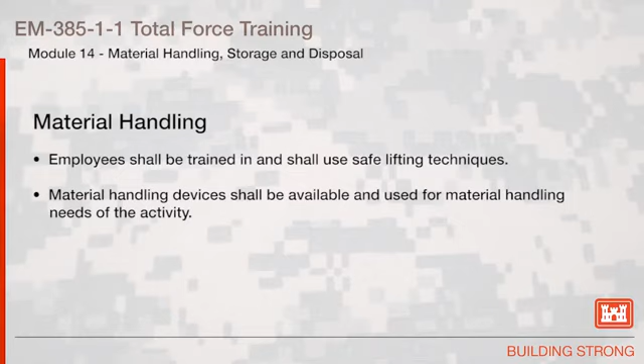Employees shall be trained in and shall use safe lifting techniques. Material handling devices shall be available and used for material handling needs of the activity.

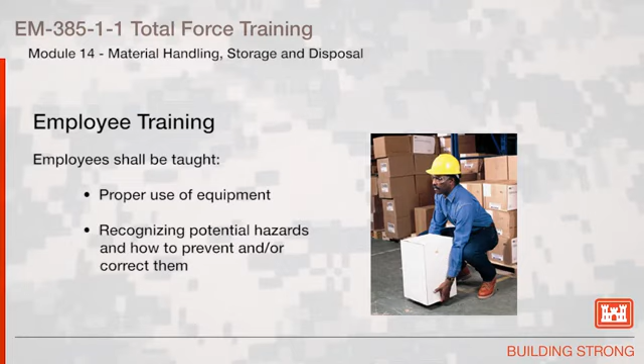Employees shall be taught how to lift safely, how to avoid unnecessary physical stress and strain, what they can comfortably handle without undue strain, proper use of equipment, and recognizing potential hazards and how to prevent or correct them.

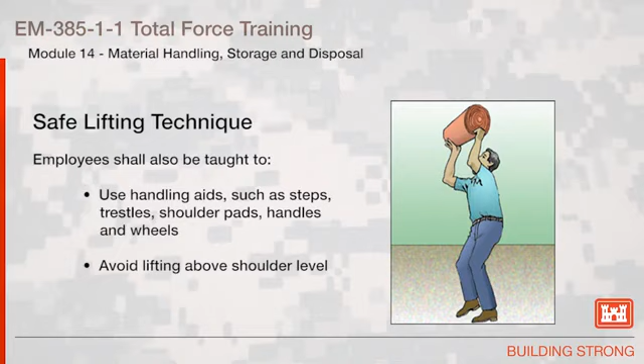Employees shall also be taught to break the load into parts, get help with heavy or bulky items, lift with the legs, keep the back straight, do not twist, and use handling aids such as steps, trestles, shoulder pads, handles, and wheels. Avoid lifting above shoulder level.

The following steps are recommended as a proper lifting technique: stand close with a shoulder width stance, squat by bending your knees and hips, put the load close and grip it, tighten your stomach, lift your head, and raise up using your legs.

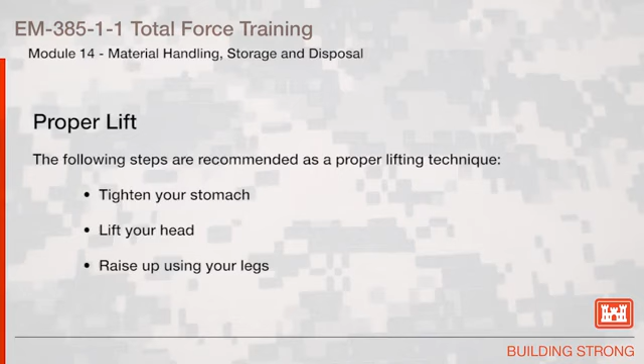Whenever heavy or bulky material is to be moved, the material handling needs shall be evaluated in terms of weight, size, distance, and path of movement.

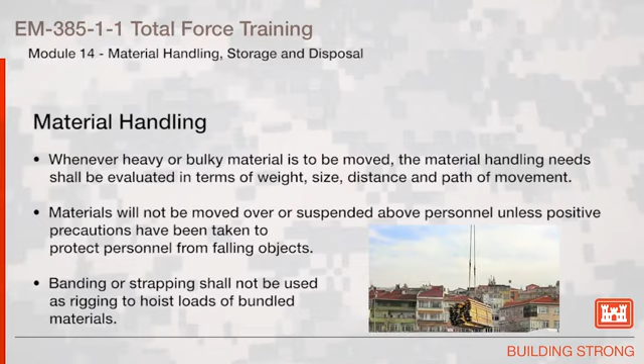Materials will not be moved over or suspended above personnel unless positive precautions have been taken to protect personnel from falling objects. Banding or strapping shall not be used as rigging to hoist loads of bundled materials.

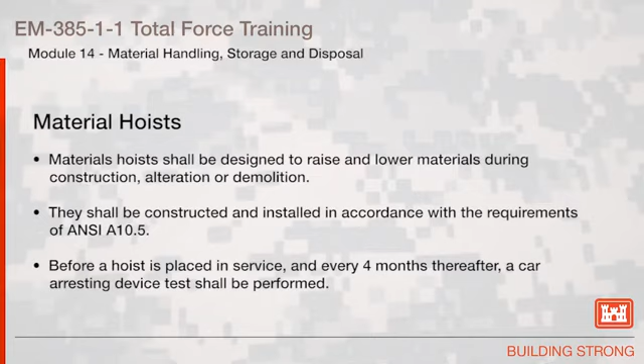Material hoists shall be designed to raise and lower materials during construction, alteration, or demolition. They shall be constructed and installed in accordance with the requirements of ANSI A10.5. Before a hoist is placed in service, and every 4 months thereafter, a car arresting device test shall be performed.

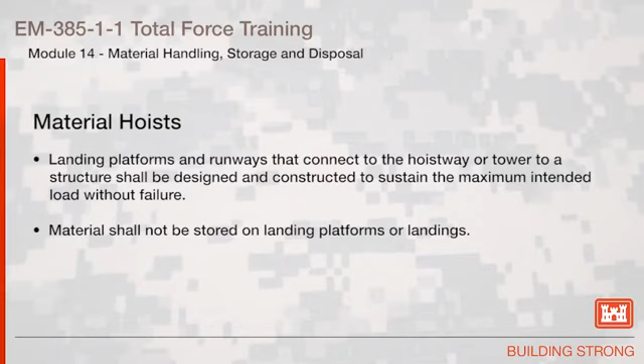Landing platforms and runways that connect the hoistway or tower to a structure shall be designed and constructed to sustain the maximum intended load without failure. Material shall not be stored on landing platforms or landings.

All material in bags, containers, bundles, or stored in tiers shall be stacked, blocked, interlocked, and limited in height for stability and security against sliding or collapse.

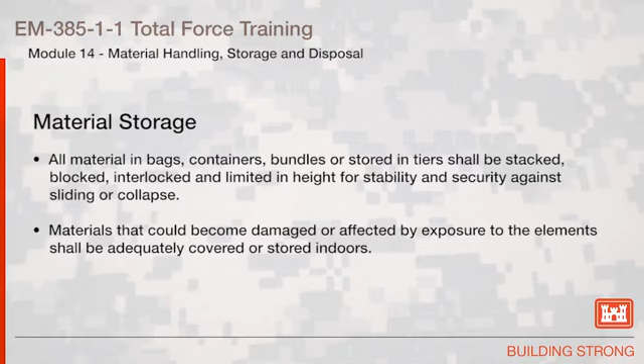Materials that could become damaged or affected by exposure to the elements shall be adequately covered or stored indoors. Materials shall not be stored in areas that would interfere with other normal operations, nor stored directly under power lines. Material storage shall be in compliance with the manufacturer's recommendations.

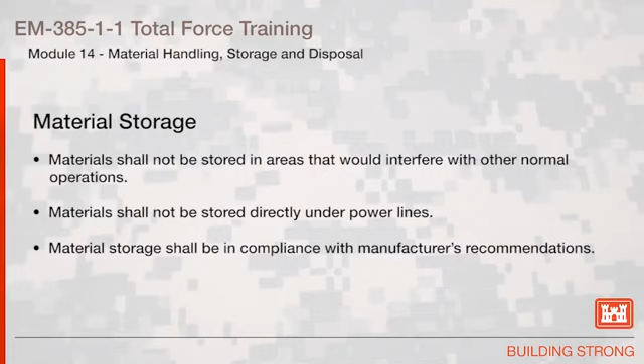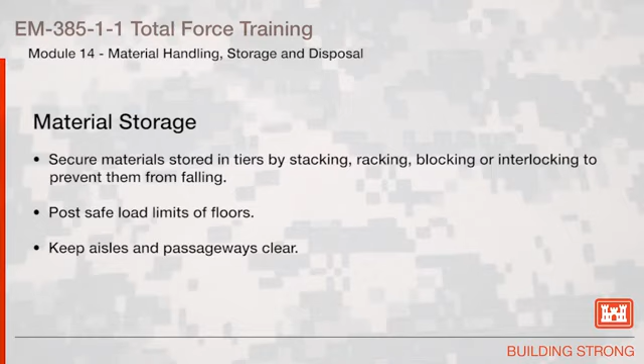Secure material stored in tiers by stacking, racking, blocking, or interlocking to prevent them from falling. Post safe load limits on floors. Keep aisles and passageways clear.

Material should not be stored on scaffolds, work platforms, or runways in excess of the standards in Section 22. Materials stored in bins or hoppers that could create an engulfment hazard shall be evaluated and comply with the confined space requirements in Section 33.

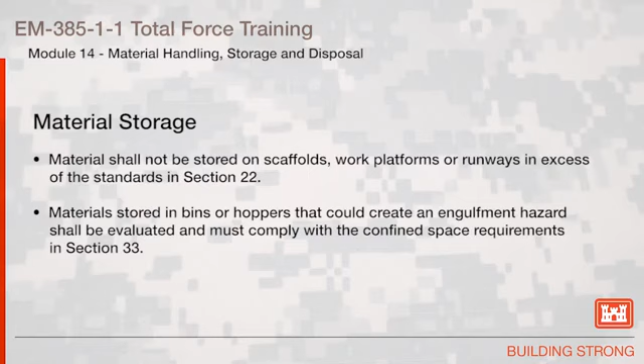Do not store non-compatible materials together. In buildings under construction, don't place stored materials within 6 feet of a hoistway or floor opening, nor within 10 feet of an exterior wall that does not extend above the material stored.

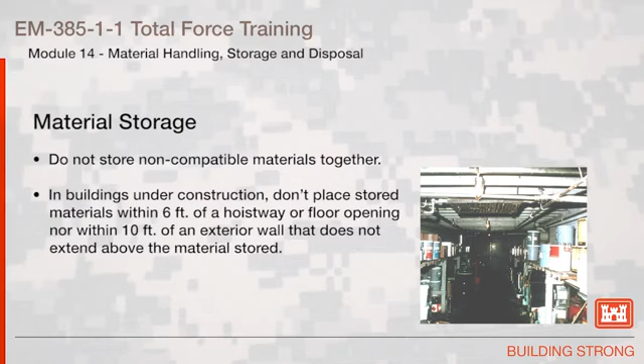When working with scaffolding, avoid potential of overloading. Placing masonry products on a scaffold could overload the deck.

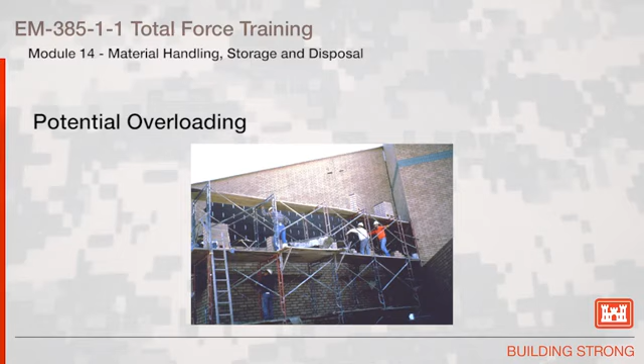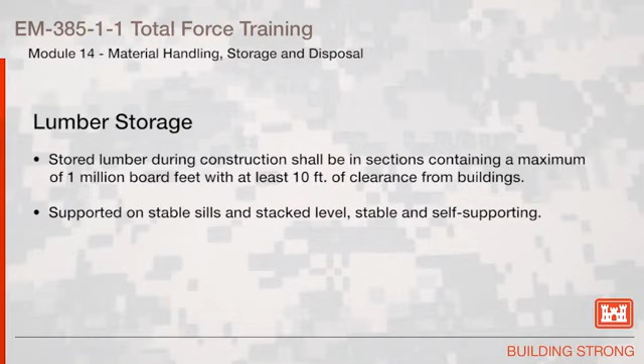Stored lumber during construction shall be in sections containing a maximum of 1 million board feet with at least 10 feet clearance from buildings. Supported on stable sills and stacked level, stable, and self-supporting.

Lumber piles shall not exceed 20 feet in height. Manually handled piles shall not be stacked more than 16 feet in height. Reusable lumber shall have all nails withdrawn before it is stacked for storage.

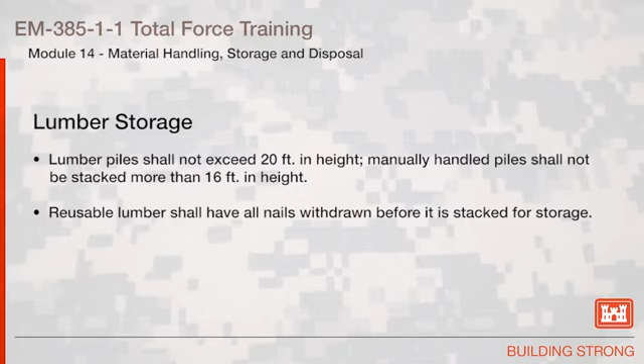Bags of cement and lime shall not be stacked more than 10 high without setback, except when retained by walls of appropriate strength. Bricks shall be stacked on an even, solid surface.

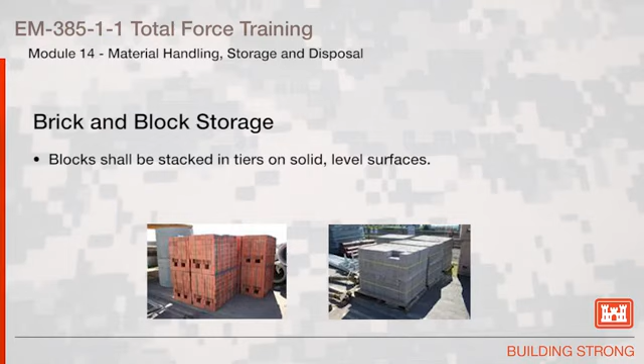Bricks shall not be stacked more than 7 feet high. Blocks shall be stacked in tiers on solid, level surfaces. Reinforcing steel shall be stored in orderly piles away from walkways and roadways.

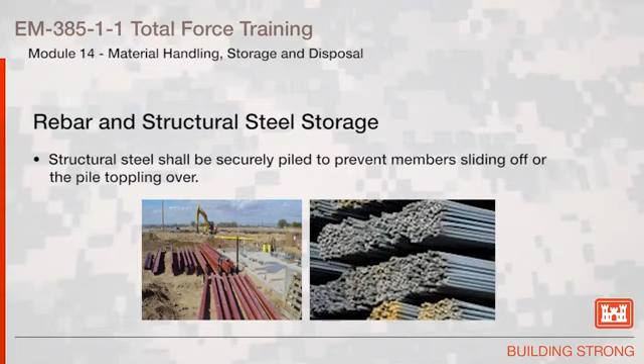Structural steel shall be securely piled to prevent members sliding off or the pile toppling over. Pipes, unless racked, shall not be stacked higher than 5 feet.

Work areas and means of access shall be maintained safe and orderly. Sufficient personnel and equipment shall be provided to ensure compliance with all housekeeping requirements.

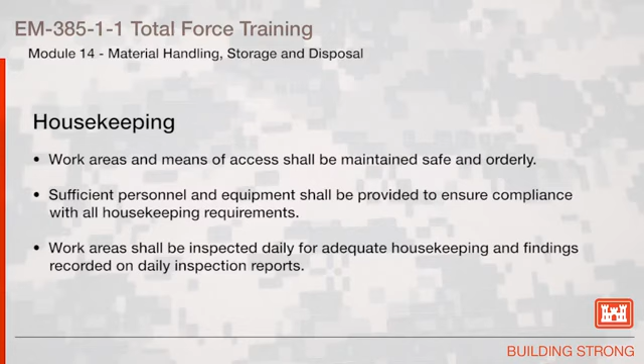Work areas shall be inspected daily for adequate housekeeping and findings recorded on daily inspection reports. Work will not be allowed in those areas that do not comply with the requirements of this section.

All stairways, passageways, gangways, and accessways shall be kept free of materials, supplies, and obstructions at all times. Protruding nails in scrap boards, planks, and timbers shall be removed, hammered in, or bent over flush with the wood at the time it is disassembled.

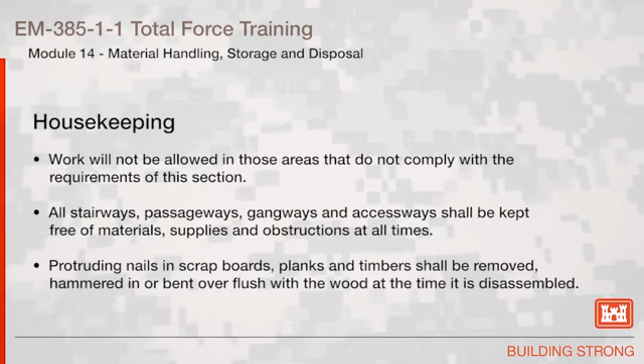A competent person shall determine and document the size, weight, and height of fall of potential falling debris. Materials, scraps, equipment, tools, and debris that have fallen into the net shall be removed as soon as possible from the net and at least before the next work shift.

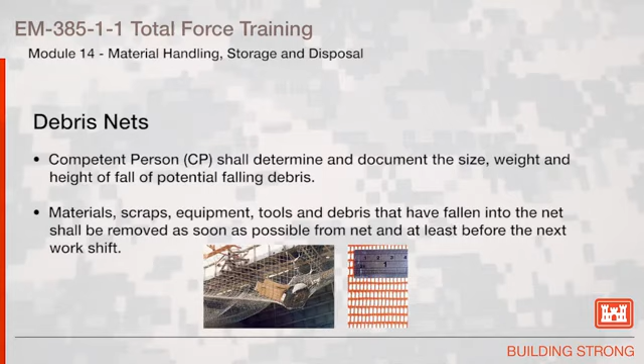Use an enclosed chute when you drop material more than 6 feet. If you drop debris through holes in the floor without chutes, enclose the drop area with barricades.

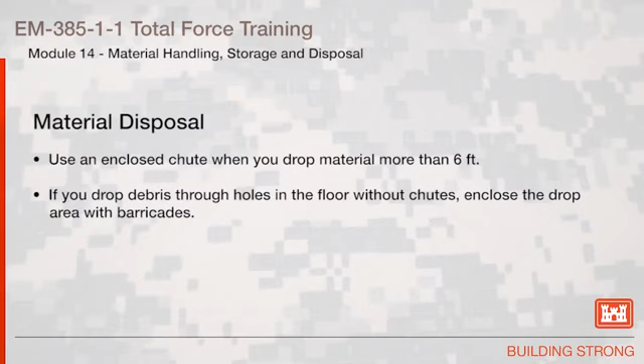Waste material and rubbish shall not be thrown down from a height of more than 6 feet unless the following are complied with: enclosed chutes. Without chutes, you're required to have barricades and signs.

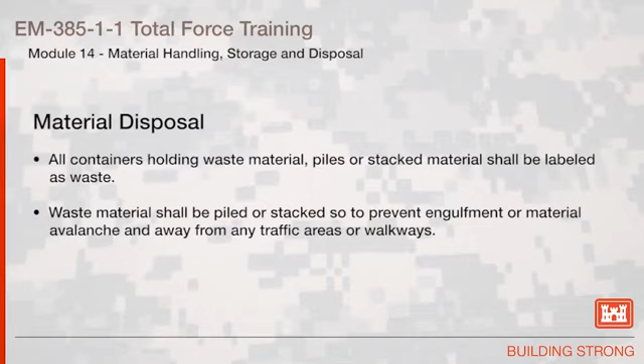All containers holding waste material, piles, or stacked material shall be labeled as waste. Waste material shall be piled or stacked so as to prevent engulfment or material avalanche and away from any traffic areas or walkways.

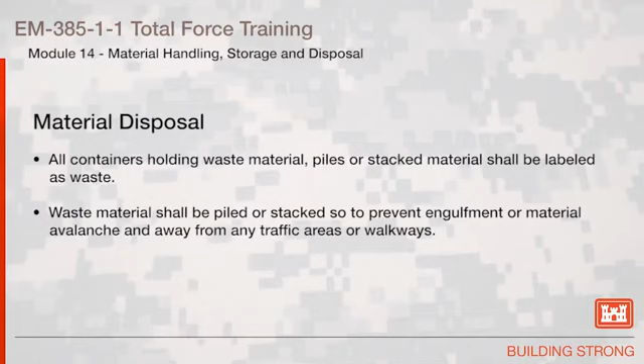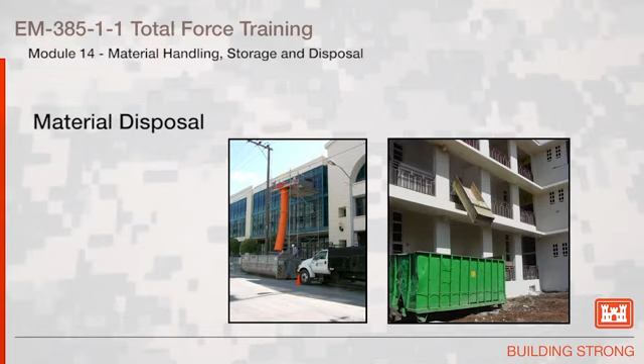The picture on the left illustrates a proper enclosed chute. The picture on the right indicates a site-made chute that does not meet the requirements.

For the proper handling of materials, use proper lifting techniques. If the object is too heavy, use proper lifting equipment. When using forklifts to move materials, watch for potential struck-by and crushed-by dangers.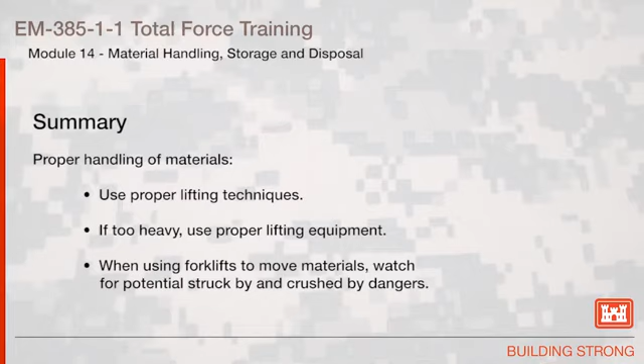For material storage, keep work areas free from debris and materials. Store materials safely to avoid struck-by or crushed-by hazards.

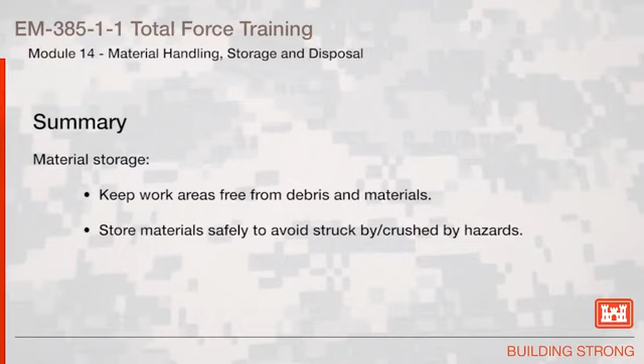Material disposal: use enclosed chutes when the heights exceed 20 feet. Otherwise, use barricades.